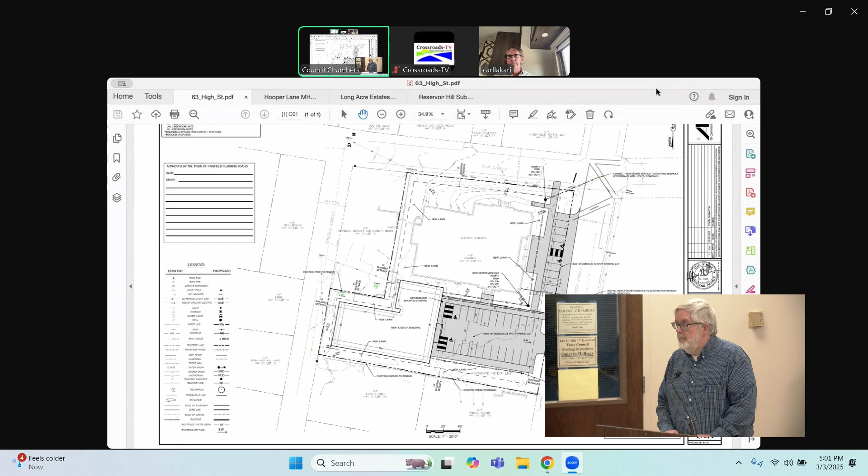We've also got 34 parking spaces that we spoke about with the planning board a month ago, and we can discuss that a little bit more later. But since last month, we've got additional information from the water and sewer departments here in town, and fire chief and police chief. So we're just looking to gather any other comments from the public at this time, I guess.

Very good, thank you, Jeff. We are in public hearings, so anybody here from the public that wants to speak to this item on our agenda, let's go ahead.

Now, I know you sent out how many letters? All the exact quantity, quite a few. A few, yeah. Actually, 13? Yeah, lucky 13. So of those letters to abutters, is anybody here tonight to speak to this item on our agenda?

Jeff, I don't mean to give you a hard time, but this is really stressing me. I see that. How about, is anybody zooming in on this issue? Nobody that I know of.

Okay, hearing no comments or no issues for the public hearing, at this time I'd like to close the public hearing. Thank you all for coming. That was great.

There wasn't really a good place to put that turnaround back within the lots, so we've pushed it out there, and we don't have anything defined out there on that large lot, but there's potential to eventually loop that around - that's the long-term goal, but we don't have that exactly ironed out yet.

I think it would be beneficial to the town to have the T turnarounds incorporated into the public roads, whether the public road extends out into that proposed retained land. Sure. I think that's just cleaner than an easement.

Yep, that's fine. And then it allows Public Works to make sure that those T turnarounds are plowed sufficiently for emergency vehicles. Yep, that's fine. That won't be a problem.

And then you had mentioned that there'd be a dry hydrant here associated with a detention pond. Which detention pond is that?

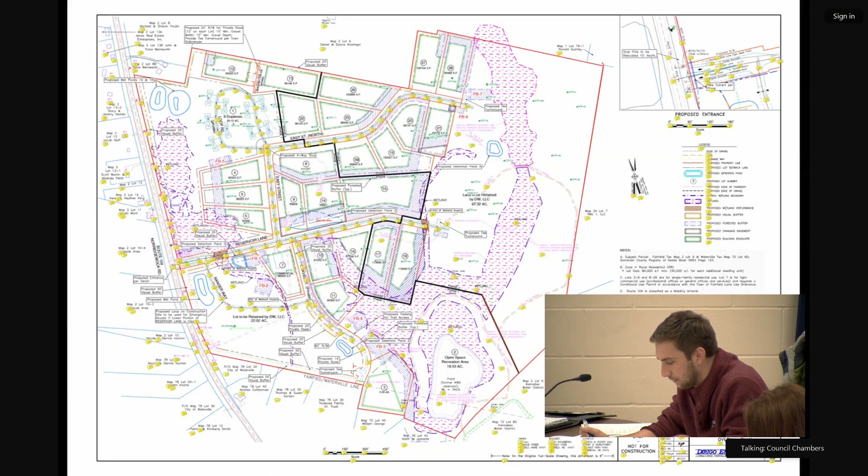It'll be the very first one as you come off from Route 104, just as you come in on Reservoir Lane, on the right-hand side. That little outline you see in blue is a proposed wet pond.

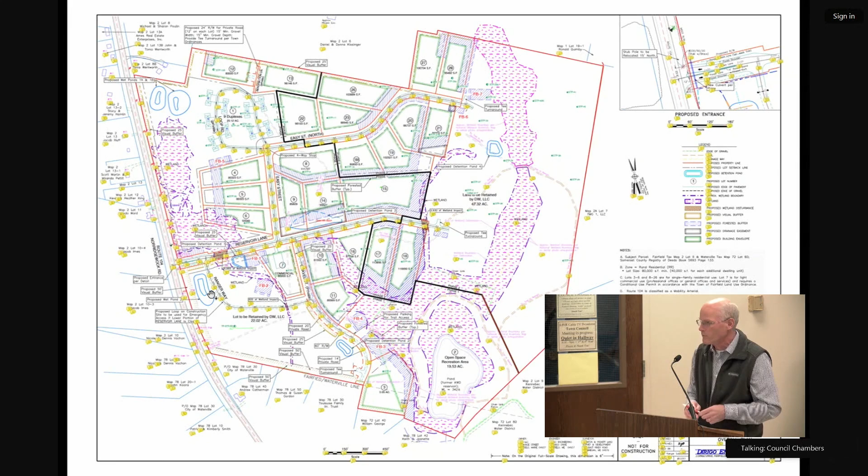Is that going to be a surface water wet pond or a below-grade cistern tank? It'll be surface water. It's kind of hard to tell on this layout, but we actually have an 8-foot lane turnout for fire trucks to pull off the road to fill up there, so the dry hydrant will be right out at the shoulder of the road.

We've got that detailed on other sheets of the plan we did for the construction site, so we can get that info to you if you like.

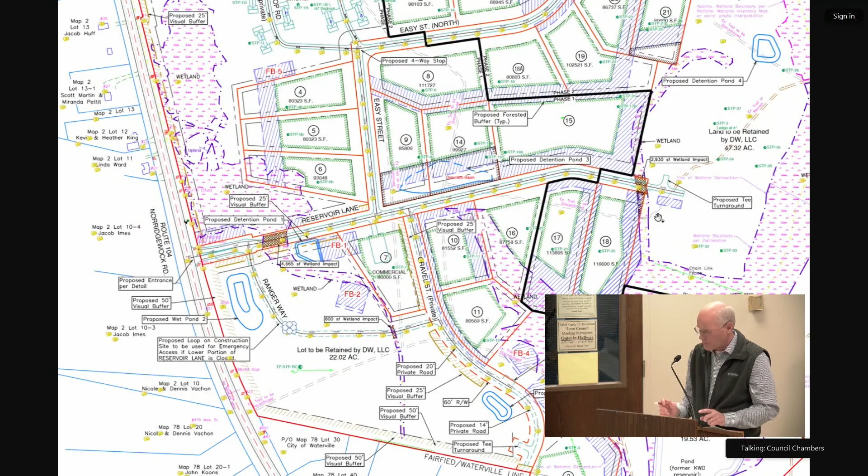At the end of Reservoir Lane, it looks like there's a wetland that's being crossed. It shows 2,930 square feet of wetland impact, and it looks like maybe there's a bridge or something planned there. Just a culvert. I'd have to look it up, but I think that was a 3-foot culvert, if I recall.

And that would be within the public road, and that would be turned over to the town as part of the public roadway? Correct, yes.

Any other questions or comments from our board on this application?

I will say, I have some concerns, and maybe it's not our purview, but about the town taking on more roadways to maintain. I agree with Max that it would be easier without an easement to have that be inside of Phase 2. I do have concerns about the town having more roadways to maintain, especially with a 3-foot culvert there, but I do like the way it's laid out. I agree with Max that the turnaround should be incorporated into it. I think that would be easier without the easement. Just my two cents.

Anything else on this application?

Nicole, do we take a vote on this one at this point? No, it's just a sketch plan. He's taking feedback so he can bring you a formal application at a later date. Right now you still have an active Phase 1, with an active bond on Phase 1. He's just getting your input for his formal application.

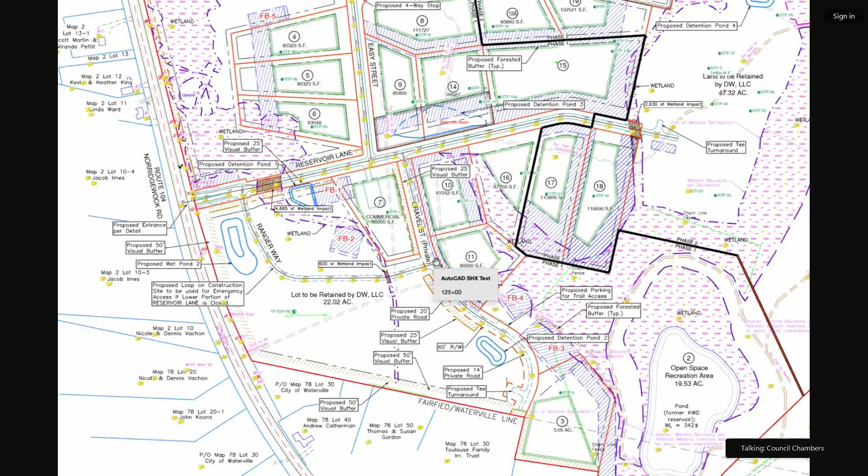I was thinking it might be nice to have an easement down the edge of Lot 18, between the land retained by DW LLC and Lot 18, to allow access in case there wasn't good access from Gravel Street. But Gravel Street provides pretty decent access, and if you look carefully, especially on the Phase 2 plan, you'll see the actual trail down to the pond is right there, accessible — that's the intent.

Yep, and I see on the Phase 2 plan where you've set out the parking area. Okay, right, yes, it is there, yep.

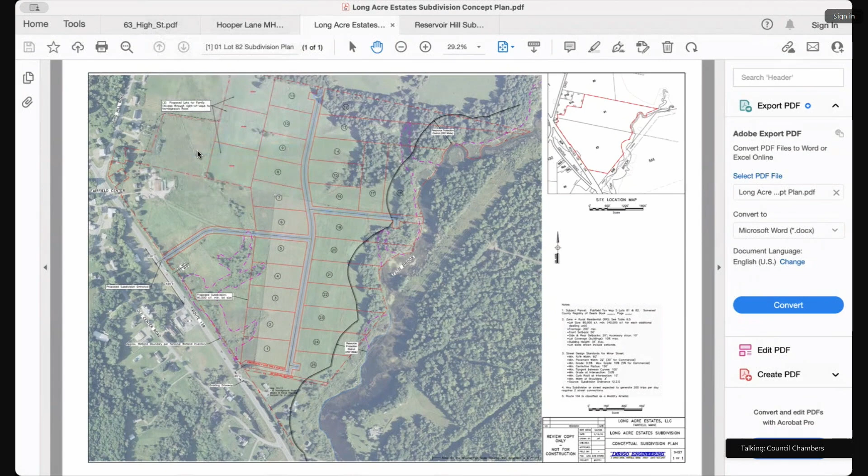Private water and sewer. We understand this is in kind of the PFAS central area out there, so we'll have to take measures like test wells to see exactly what we're up against. We're well prepared to provide filters if necessary.

The site is adjacent to Fisher Brook, so some lots will have shoreline zoning, resource protection district. A couple of the lots, I think, we'll have to revise — Nicole pointed out that we have them too long, at a 5-to-1 ratio. Lots 12 and 13 — I think you have the same plan I do — are currently shown longer than what the ordinance allows, so I'll modify those to get them into compliance.

For fire protection, we haven't communicated with the fire chief yet, but we anticipate it'll be similar to Reservoir Hill out there, where he required sprinklers in the homes. I don't think we have public water very close to that area, so no hydrants.

One thing we'll have to look into: if we exceed 20 lots, that'll put us over that 200 trip threshold. Looking at the highway manuals, it's slightly under 10 trips per lot, maybe 9.5 or so. So once we get much over 20 or 21 lots, that kicks us over the 200 trips per day threshold, and we'll have to consider how to provide a second means of entrance, if that's something you're anxious to have.

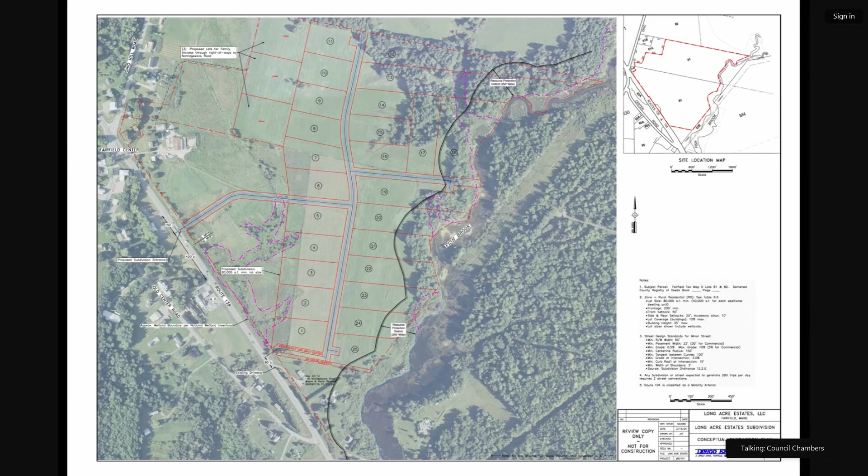I welcome any questions or comments from the board on this application. The 3 lots being proposed for family, with access from Norridgewock Road — are those existing lots, or would they be lots broken up as part of this subdivision?

We've got to look into the legalities of that. This is probably going to be phased, likely a 5 or 6 year plan. So next time we come back, you're probably going to see a much scaled down version. The intent is to try to get something started this summer, meaning we'll scale this down to something like 8 or 10 lots.

I don't think the lots intended for family are immediate — I assume those aren't for his children right away, so there'll be a few years before they're ready. It won't necessarily be in the first phase we present, but we wanted you to be aware of it.

Okay, because I would think those would be part of the subdivision if they're getting split. I've got to check in with a surveyor, and a final plan would be coming from a surveyor. There's differences as to whether or not, when you sell or give to family members, that's managed differently. But we'll make sure we address that properly.

What was the decision around private wells versus public water? Is there public water out there? It's pretty close, right at the emergency access road. I didn't realize they had it so close, even though Dirigo Engineering did the whole study for the extension. We'll look into that, it might solve the problem and be a selling point for potential home buyers.

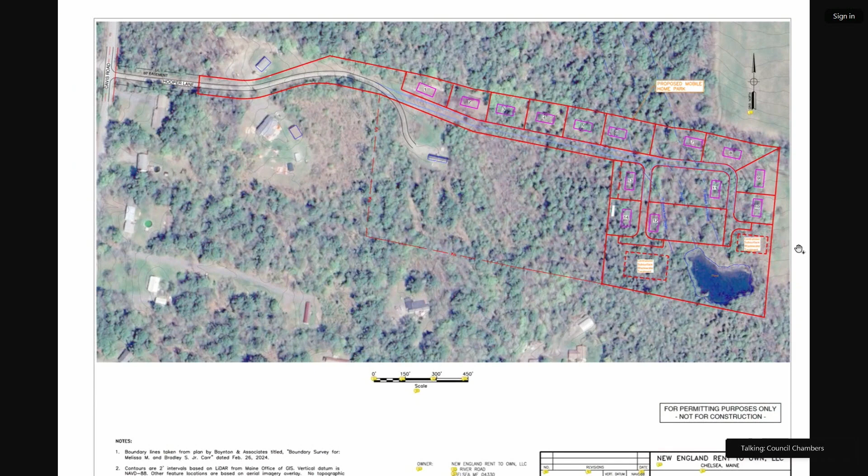We haven't had it formally delineated yet, but I know there are some wetlands there that we hadn't shown yet. There's a stream coming out of that pond, and I show 75-foot setbacks from that stream, so the wetlands are mostly within that stream, but there's some off to the left around lot 13 as well, so I wouldn't be surprised if we lose a couple of lots because of that.

So this whole lot is essentially a big L-shaped lot, or shaped like a big J, coming off from Davis Road, Hooper Lane. The first few hundred feet is across an easement, as you can see off to the left there, coming off Davis Road. You'll notice the E/L line.

That simply means easement limit, so 60-foot easement coming off from there. A good two-thirds of the road is owned by the developer, New England Rent to Own. Don't be misled by the name of the company, they've been in business for a number of years. That's just the name of the company.

That's not necessarily the model they'll use here, as far as doing it in a traditional mobile home fashion, where typically the developer owns the lots, the tenant owns the homes and leases the space. That's pretty much the plan here. The goal is to go with centralized subsurface wastewater treatment systems. The town does not have a mobile home ordinance per se.

So what Nicole instructed me is essentially to use the state's model, which requires a 12,000 square foot lot - that's a pretty healthy lot for a mobile home site. A lot like Waterville, for example, is 5,000 square feet. So these are fairly spacious.

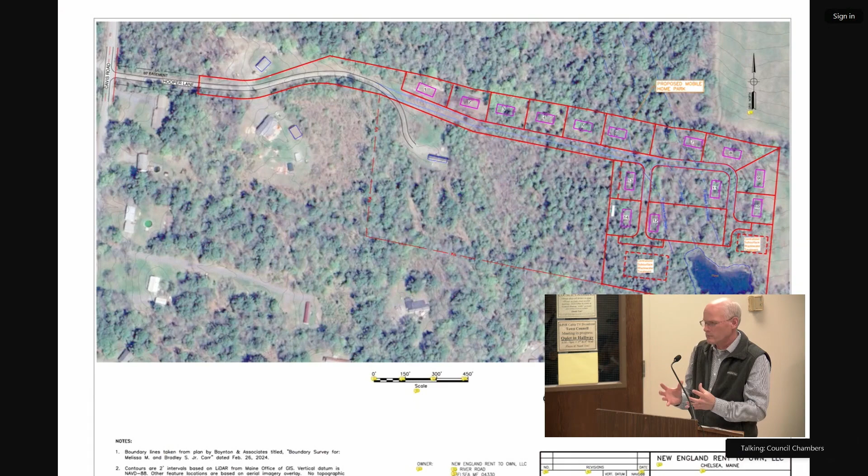Another requirement, the state doesn't require it, but the manufactured housing rules require that if you're on a subsurface wastewater system, your lots don't necessarily need to be 20,000 square feet, but you've got to have enough aggregate throughout your entire park to accommodate 20,000 square feet. We do have that here with what we've got. Again, I've got to back up and check the wetlands - if it doesn't work out right, we could end up losing a couple of lots due to that.

So that's the intent. Generally, the flow or lay of the land, it's from Lot 1, which is up there on the left - that's pretty flat up in that area. Then as you get down to lots 3, 4, 5, it kind of pitches to the southeast, generally speaking, toward the pond at about maybe a 4 or 5 percent slope. So it's a pretty good site for development of this nature.

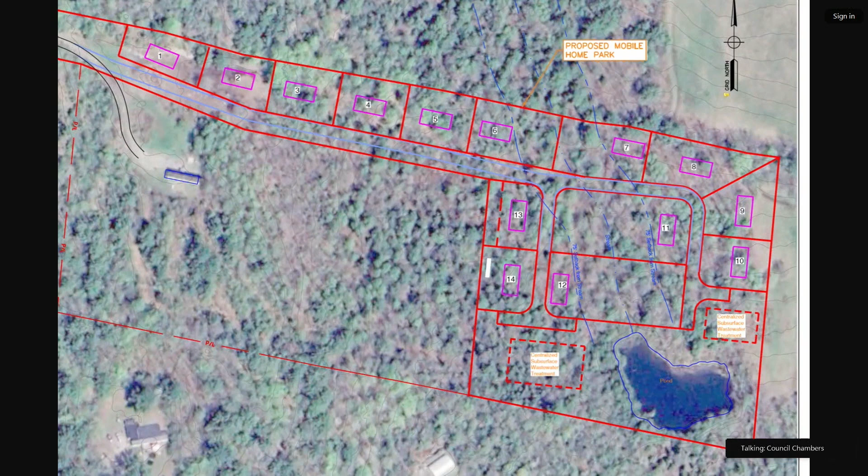Congregate septics, private wells as well? Yes, correct - well, actually, on this one it would probably be a community well that's the plan here. Okay. And that would have to be, anything over 10 lots would have to go through DHS.

Anything from our board on this item? It looks like on the property there is, I guess, maybe an existing home. Yes, that's my home - that's a separate piece of property. Oh, that's a mobile home there, yeah. So essentially this 10-acre piece, you've kind of got that square down to the right.

And then just that 100-foot wide strip going up towards Davis Road - that's the piece that the mobile home park is on. This other property is owned by Mr. Salter, is that correct? Yes. Does Mr. Salter's property, as well as it looks like maybe there's a house to the north of the roadway as well? That's me, probably.

Back closer to Davis Road, you're talking about? Closer to Davis Road, yes, yep. Yeah, as you come in off from Davis Road, there are, I guess, three homes - and I might be wrong, I'm not sure if there's one on the left.

Do those three properties have easement access through this property that's proposed for development? They do, at least to a section of the road. I haven't read their deeds, but they've got access to the road, yes. Because I'd want to make sure before we further complicate this area. But as far as maintenance, there's no maintenance done by the town, no plowing, none of that - we have to do that ourselves.

My understanding, Randy, is this is under the private road ordinance for this road, so the town is not being asked to have this built to town standards, inspect it to town standards, and maintain it. We're being asked, I believe, at sketch plan review here tonight, that this is under the private road ordinance. So the developer who is developing in here would own the maintenance, repair, and upkeep of that road under the private road ordinance. Okay, that's one answer.

Another thing you can probably answer, the mobile homes, it's going to be lots, and somebody's going to be bringing in their mobile home to plant it there? Correct. Is there going to be an age limit to these mobile homes? Because a lot of these mobile homes come in raggedy and stay there for 10, 15, 20 years.

I don't know the answer to that, but I'll get the answer. And are there going to be any kind of regulations, supervision in place for people to follow in this mobile home park, as far as maintenance, as far as conduct, as far as ATVs all over the place? Basically, I guess what I'm concerned with is having this whole place turn into a ghetto, which normally happens.

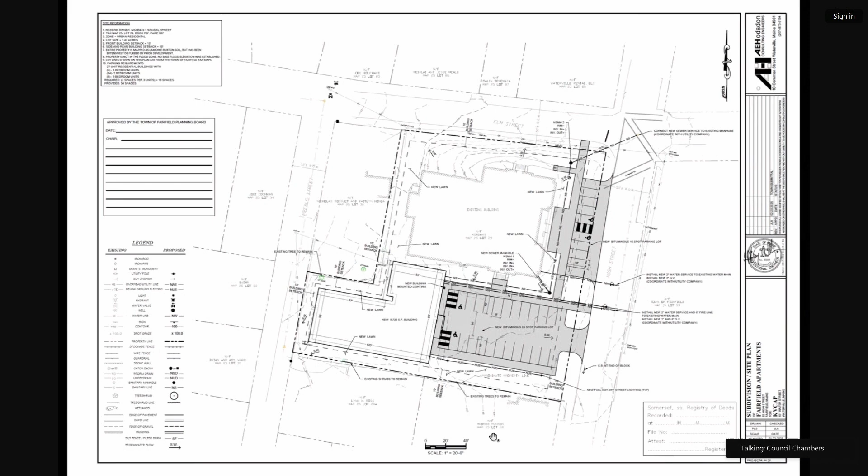The nearest catch basin on High Street is down at the next intersection, and I note that it's curbed all the way down. In Mr. Munson's driveway, I'm not sure how the water goes by that now, but if it does not, we could put in a small speed bump that would keep the water in the road and keep it going down to the catch basin at Kelly Street. My plan doesn't go quite far enough.

Could a catch basin be installed at the entrance to High Street, with a new storm drain running down to that catch basin at the corner of Kelly Street? I'm just concerned that that's a lot of impervious area to be dumping into a town road.

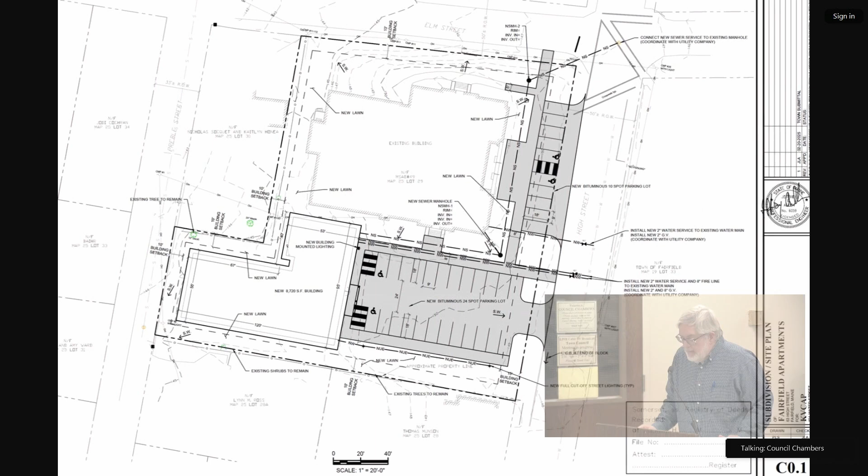Well, actually we're reducing the impervious area some up in front of the school building because we've reduced the amount of parking spaces there. Right now we've got double-decker parking going right from the road all the way to the face of the building, so we're putting in some new grass there, which will reduce the impervious area some. There is an increase, so if it were necessary we could put in a catch basin there and go down the right-of-way, but that would be quite expensive, and I don't know if there is a need for it. The increase in flow from this 24-space parking lot is going to take a while to go along the curb, but that appears to be what's been done in the past for some time. So that's ultimately your decision, but I believe it's adequate without it.

And of course, around the existing school building, the water's going to keep going off as it is anyway — no change there, except behind the school, on the west side, there's a gravel driveway, and we're proposing to replace that with lawn, which would decrease impervious area there. That area drains to a catch basin on the corner of Preble and Elm Street, so that would drain out toward Elm and would be decreasing the flow there.

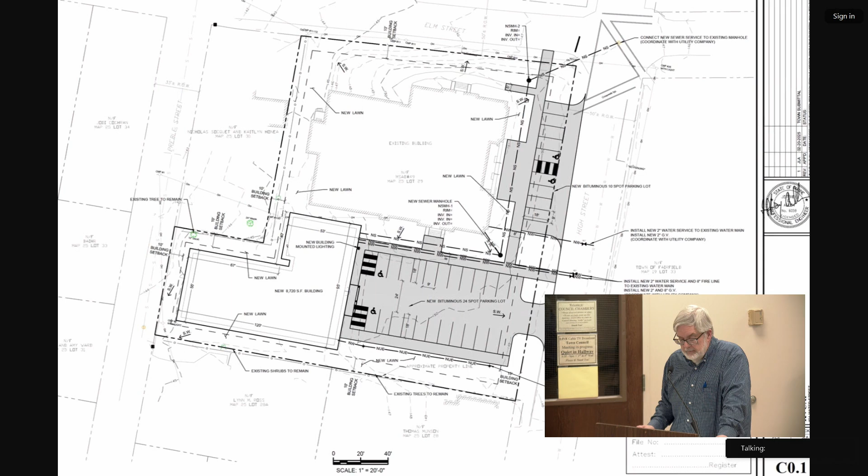I'm very concerned about the amount of stormwater that's going to be dumped into High Street. I understand that up at the existing parking area some pavement's going to be reduced, but we're adding a lot of pavement where the existing playground is. To assume, with really just assumptions, that water won't get into the traveled portion of High Street, I think is risky. And even if it doesn't, there's going to be a lot of ice buildup right there potentially for people coming in and out of this parking lot.

I think it's a sound development move to install a catch basin at the entrance to that new parking area and then run a new storm drain down to that existing storm drain infrastructure. It eliminates risk, as opposed to crossing our fingers and waiting for an accident before the town has to shoulder the cost of installing a catch basin there. What is the run to Kelly Street, do you know? It's a couple hundred feet.